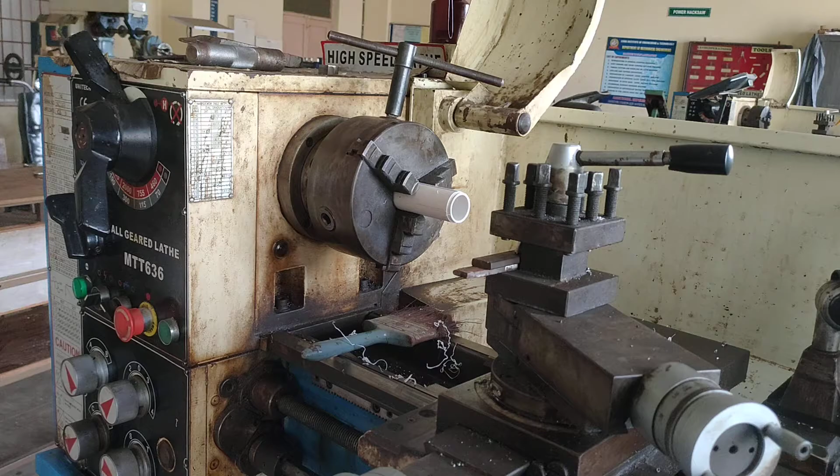Good morning, friends. Today I am going to discuss different types of chucks. What is the importance of chucks? Why do we use chucks? We will discuss this now.

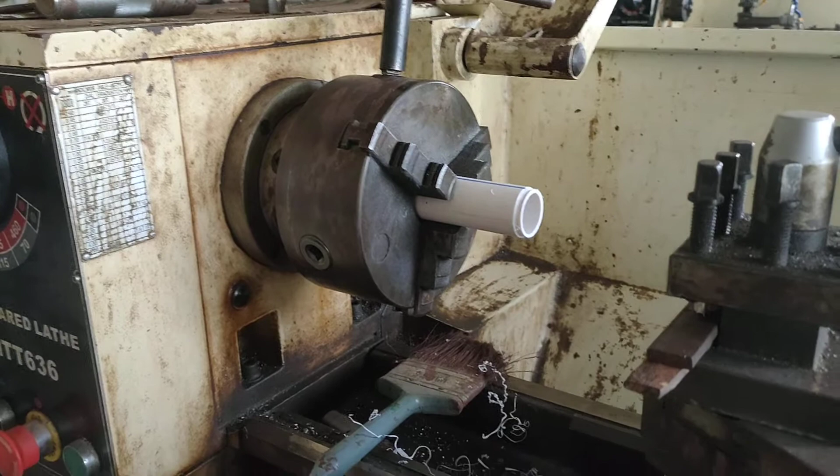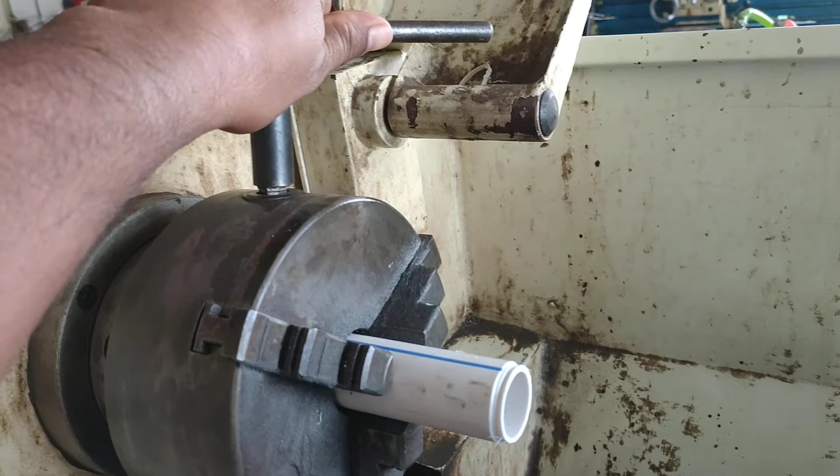A chuck is a device mainly used for holding workpieces. This is the workpiece, a PVC type workpiece. If you want to hold this type of metal workpiece, you can hold it, no problem. The main motto of a chuck is to hold the workpieces with the help of a chuck wrench. When the chuck wrench moves, it can move like this.

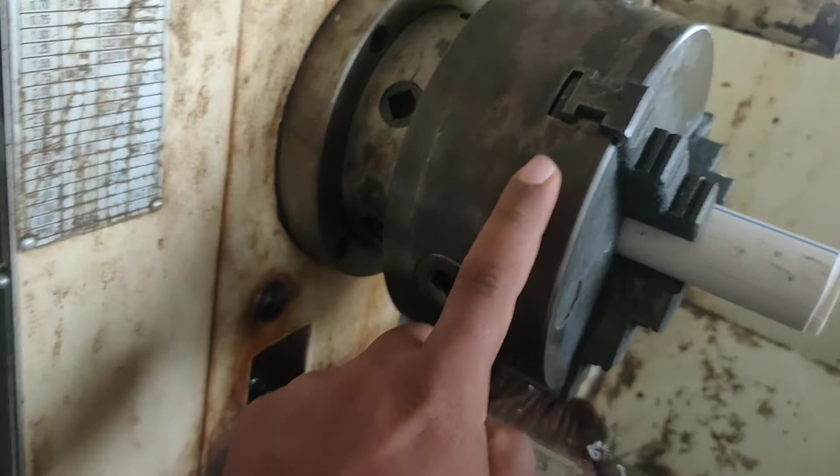In the same way, with the help of the chuck, we have to hold long length jobs as well as short length jobs. These chucks are fixed on the spindle, fixed to the spindle in this way.

Chucks have internal threads on the back portion. This is the front portion. In the back portion, these have some internal threads. These internal threads are fitted on the top surface of the spindle. The spindle has external threads, and the chuck has internal threads. These internal threads are fitted onto the spindle nose.

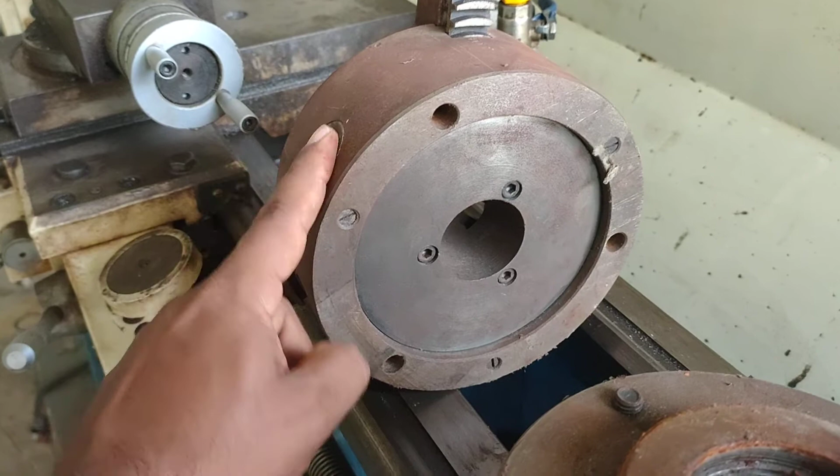Some chucks don't have internal threads. These have small holes for holding small hinges. Some hinges come and fit into this particular hole. In this way also we can fix the chuck on the spindle. Sometimes the chuck is attached to the lathe spindle by means of two or three bolts, with a back plate screwed onto the spindle nose.

These chucks are rotated manually as well as automatically. Chucks can be rotated with the help of power, or you can rotate them manually with the help of a chuck wrench. We will see how we can rotate this. We can rotate it with the help of electric power in this way. We can also rotate the chuck with the help of a chuck wrench manually, in this way.

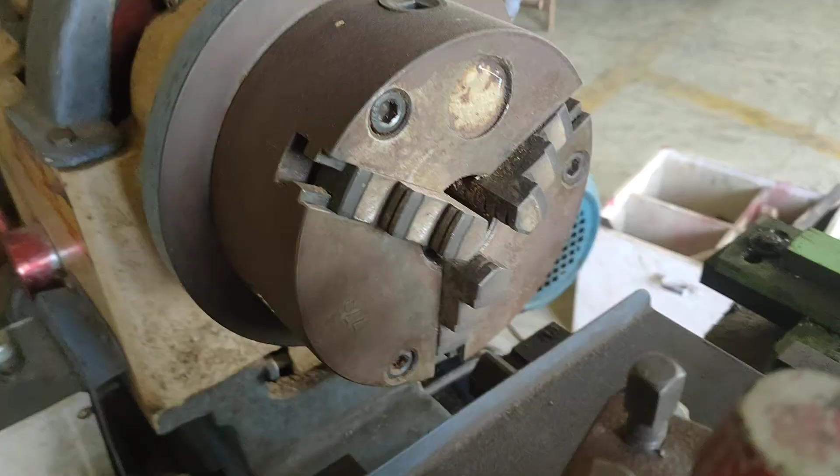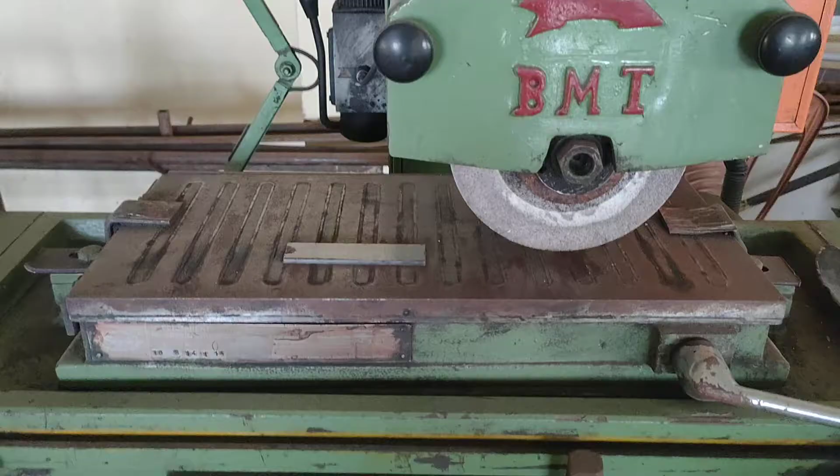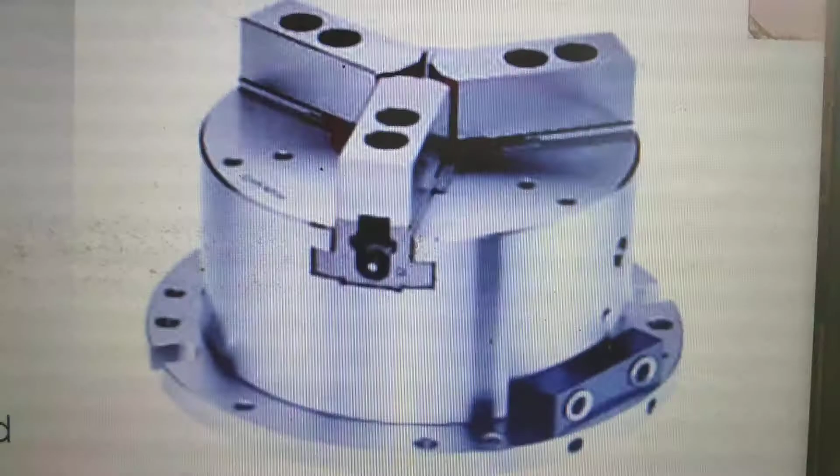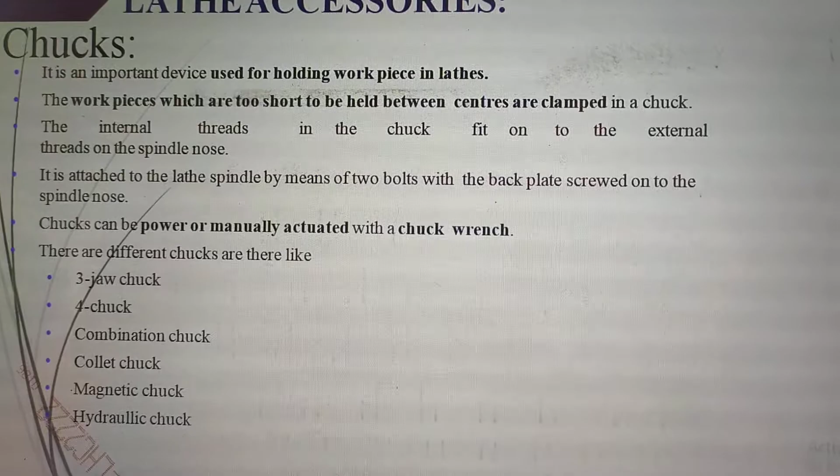Coming to the topic, we have different types of chucks: three-jaw chuck, four-jaw chuck, combination chuck, magnetic chuck, collet chuck, and drill chuck. And finally we have hydraulic chucks also. So we have different types of chucks like three-jaw chuck, four-jaw chuck, combination chuck, collet chuck, magnetic chuck, and hydraulic chuck. Chucks are mainly used for holding workpieces only, and these are operated by power as well as manually.

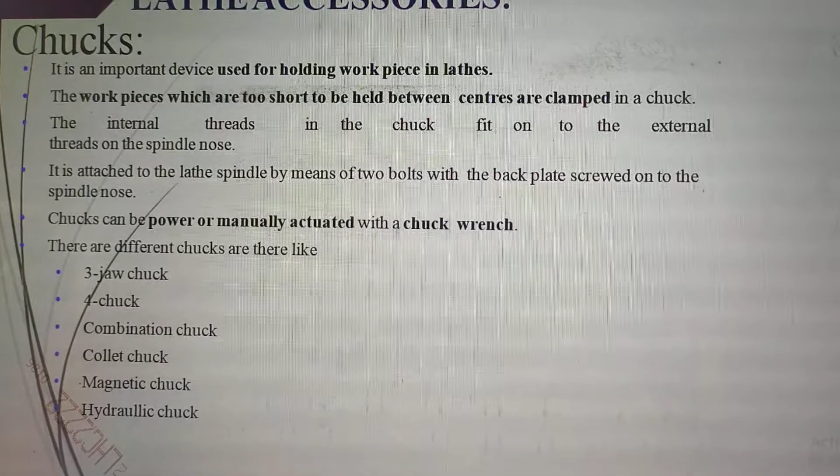Coming to the three-jaw chuck. This is the three-jaw chuck. It is also called a self-centering chuck and also called a scroll chuck. This chuck is only used for holding round jobs and hexagonal workpieces. These three jaws are moved simultaneously when adjusted by the chuck wrench. We will see how it is moving.

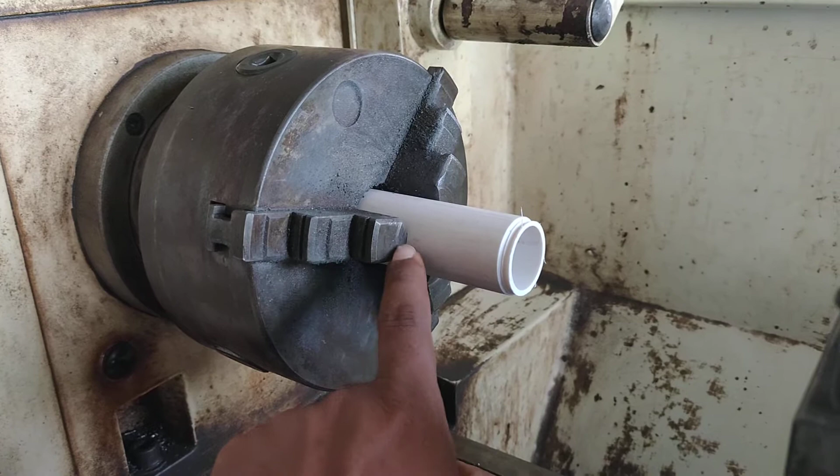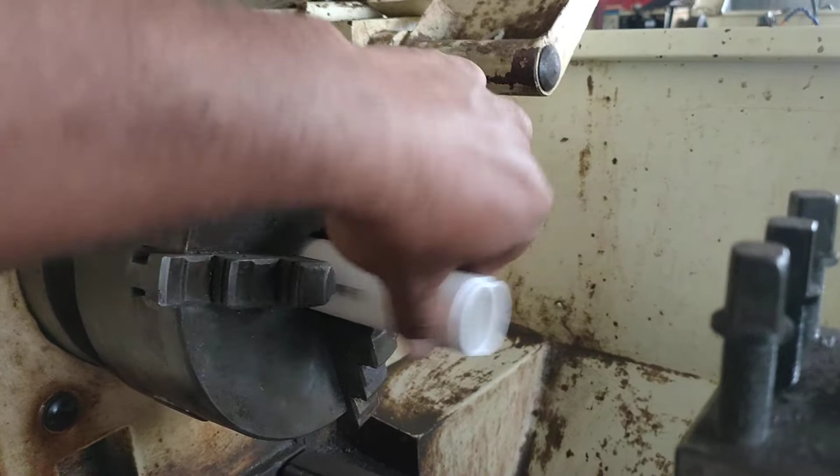This is the chuck wrench. These jaws are moved simultaneously when the chuck wrench moves. I am showing you here. When I am rotating the chuck wrench, all three jaws are moving at a time, so self-centering of the workpiece is happening here.

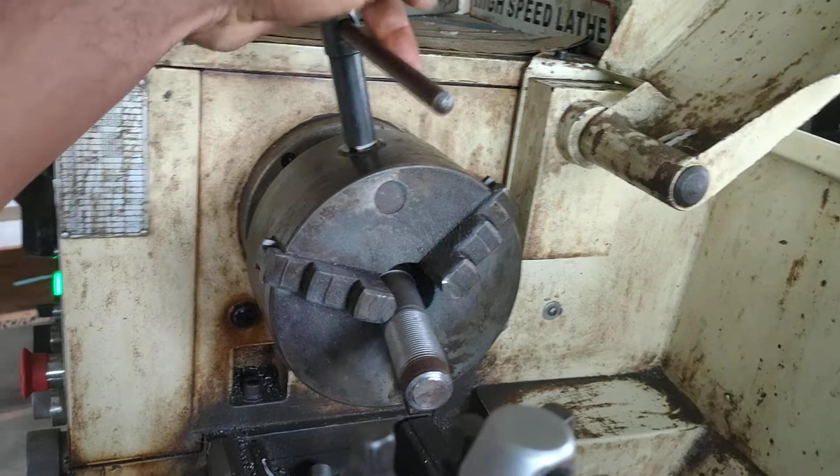Now I'm placing one more workpiece. In this way we can hold the workpiece in the 3-jaw chuck.

These are usually provided with two sets of jaws. This is one set of jaws, and we have one more set of jaws also. This type of jaw set is used for holding internal chucking, while one more type of jaw is used for outside chucking. So we have two sets of jaws, one for outside chucking and the other for inside chucking.

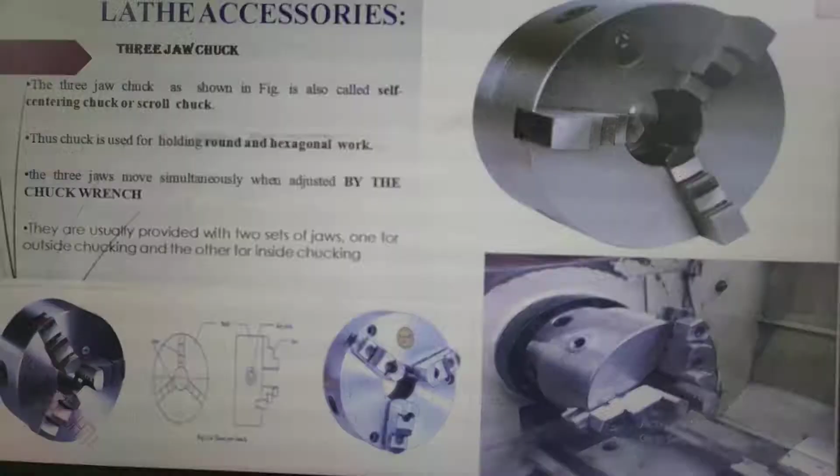So, 3-jaw chucks are also called self-centering chucks. These are used for holding round jobs as well as hexagonal jobs, and they are easily adjusted by the chuck wrench.

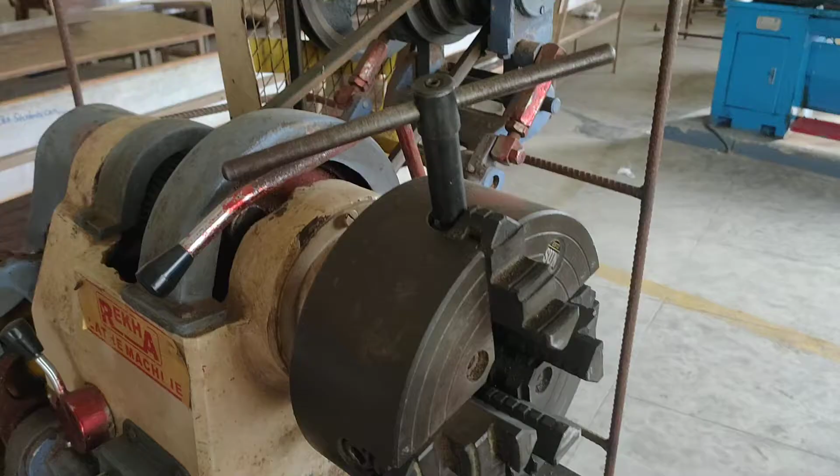Coming to the 4-jaw chuck. This chuck has 4 jaws, each of which can be adjusted independently by a chuck wrench. It has 4 jaws: 1, 2, 3 and 4. These jaws are adjusted independently with the help of the chuck wrench. When I am rotating this particular chuck wrench, only this jaw can move. We will see.

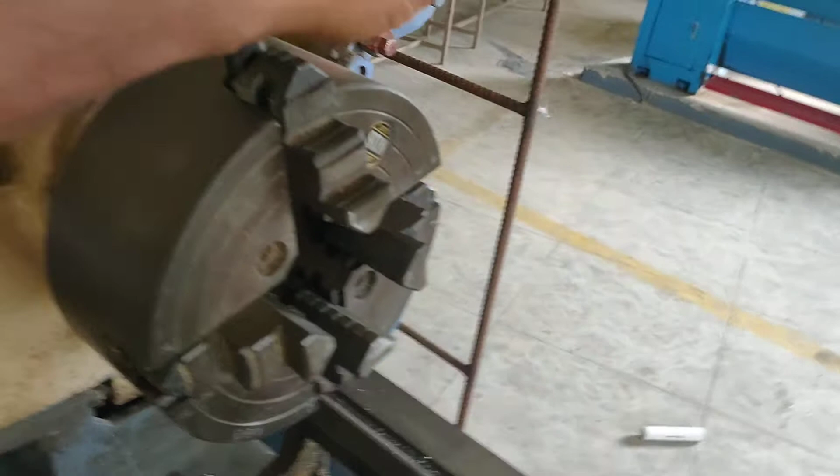You can observe only that jaw can move; all the other jaws remain stationary. In this way we can fix the workpiece in this particular 4-jaw chuck.

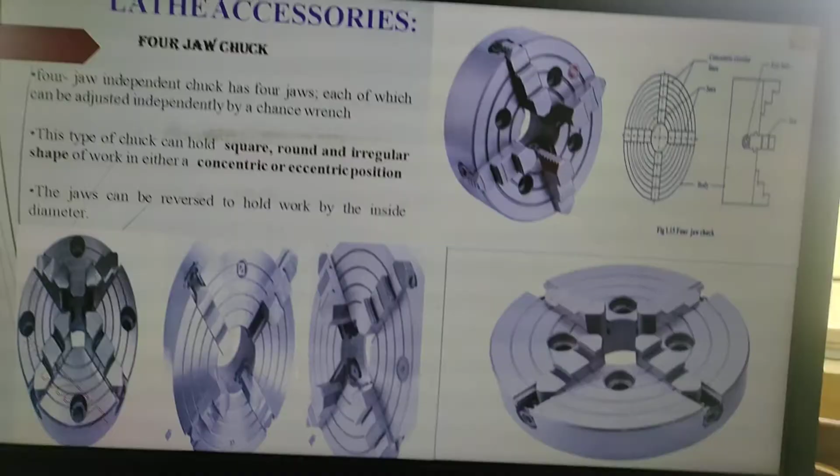Coming to the 4-jaw chuck: this type of chuck can hold square, round, and irregular shaped work, either in concentric or eccentric position. The jaws can be reversed to hold work by the inside diameter. So these are the different types of 4-jaw chucks.

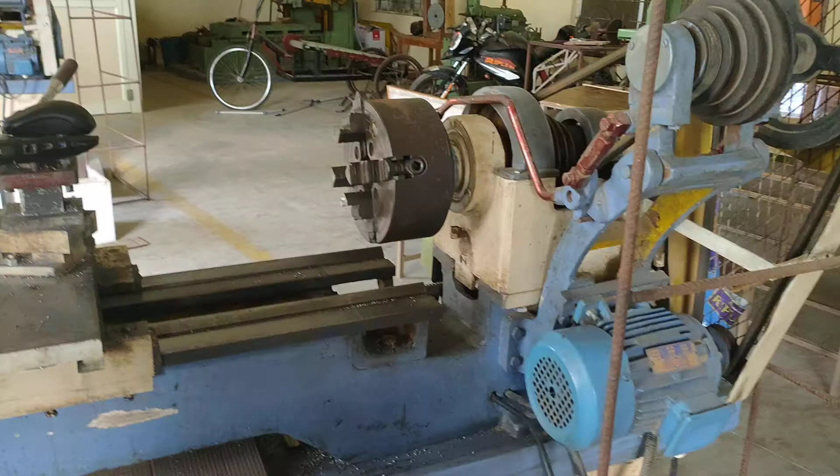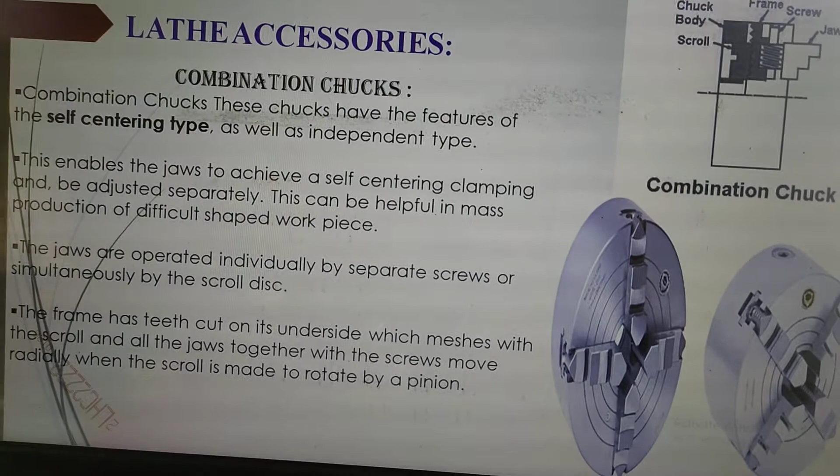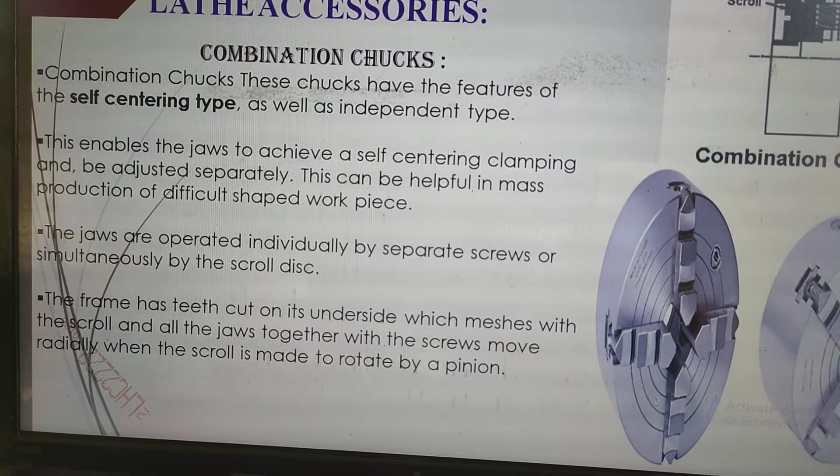So this is a combination chuck which is fixed on a lathe machine. We will see how it is working. So coming to combination chuck. Combination chuck has features of both the 3-jaw chuck and the 4-jaw chuck. So it has features of the self-centering type as well as the independent type. That's why this is called a combination chuck.

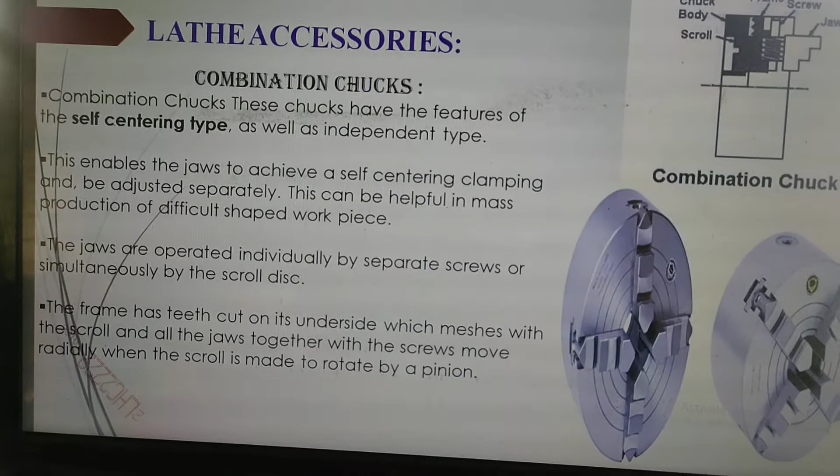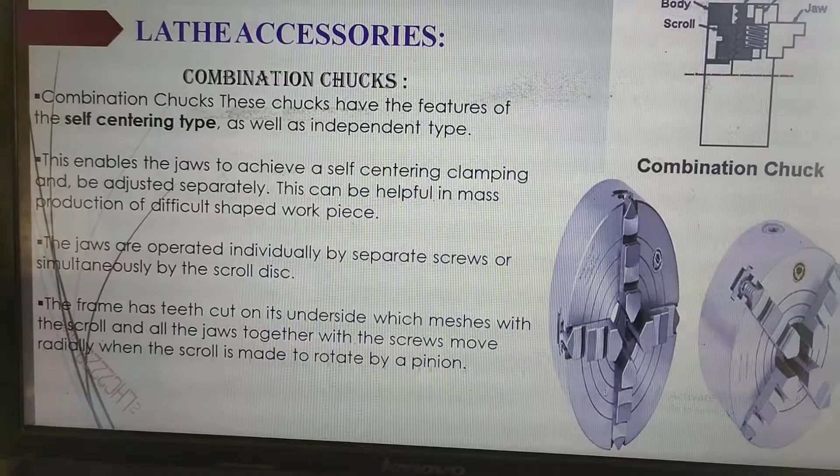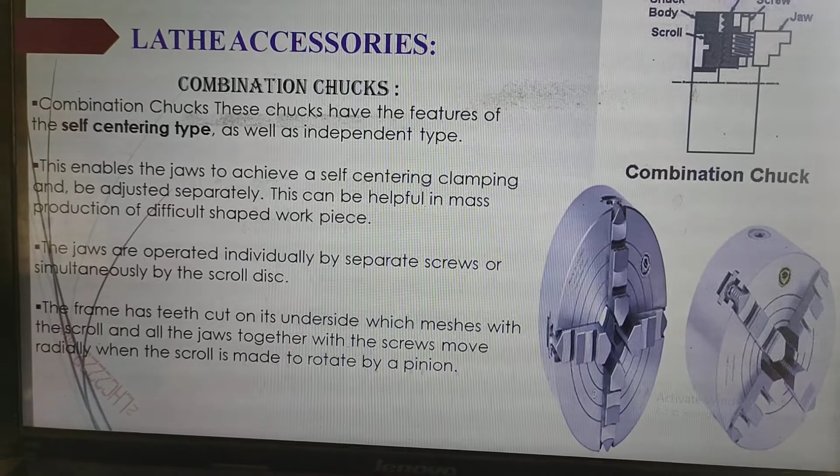Actually, these jaws are operated individually by separate screws or simultaneously by the scroll disc. Separate screws are the 4-jaw chuck feature, and the scroll disc is found in the 3-jaw chuck only. So that's why this has two features, 3-jaw chuck features as well as 4-jaw chuck features. That's why this is called a combination chuck.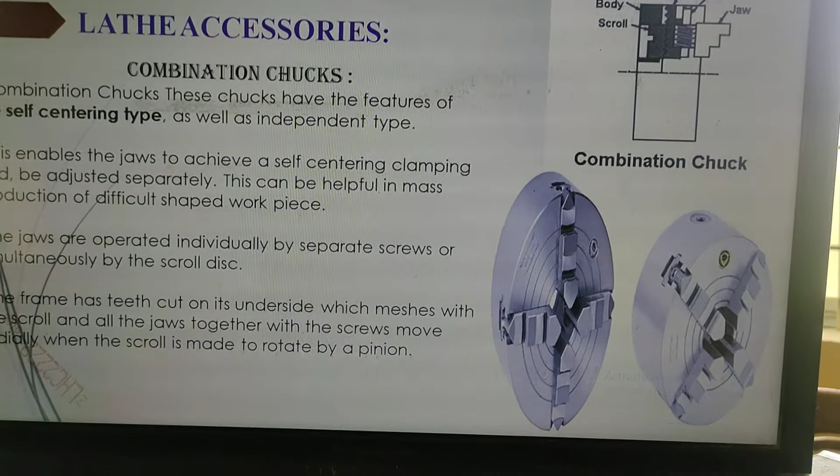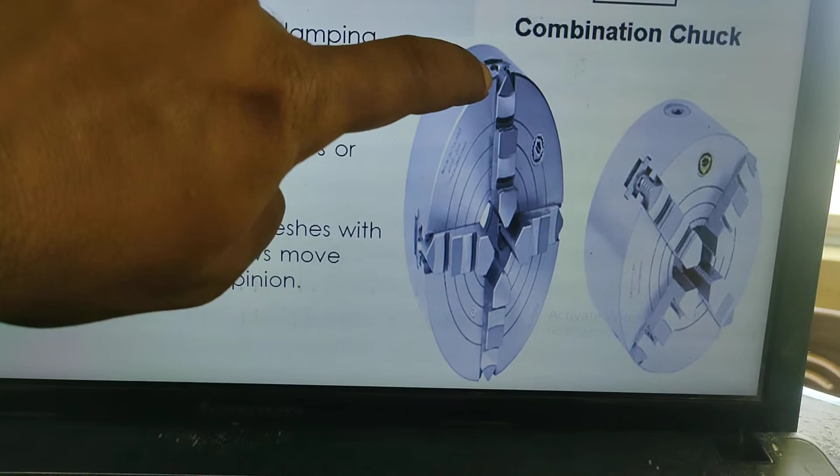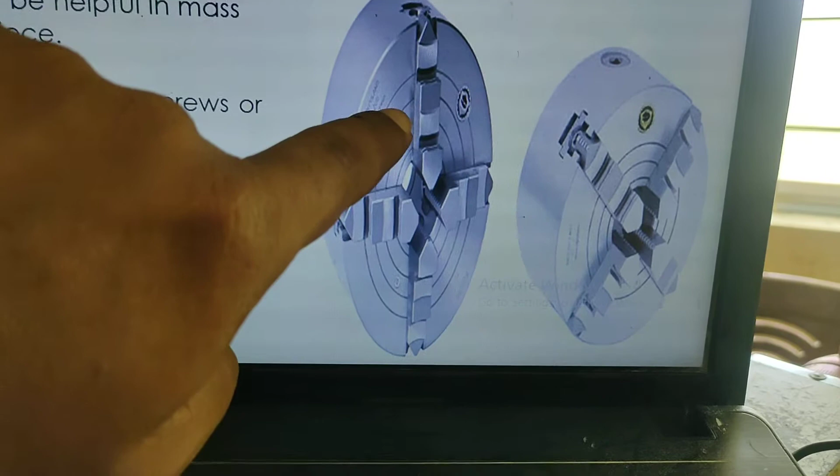So the combination chuck has 4 jaws, like these 4 jaws. With the help of a chuck wrench, we can move this particular screw, and this particular jaw will move. If you want to move all four jaws, you can use this hole with the help of the chuck wrench. All 4 jaws will move, because these 4 jaws are attached to the scroll disc. The scroll disc is an internal mechanism.

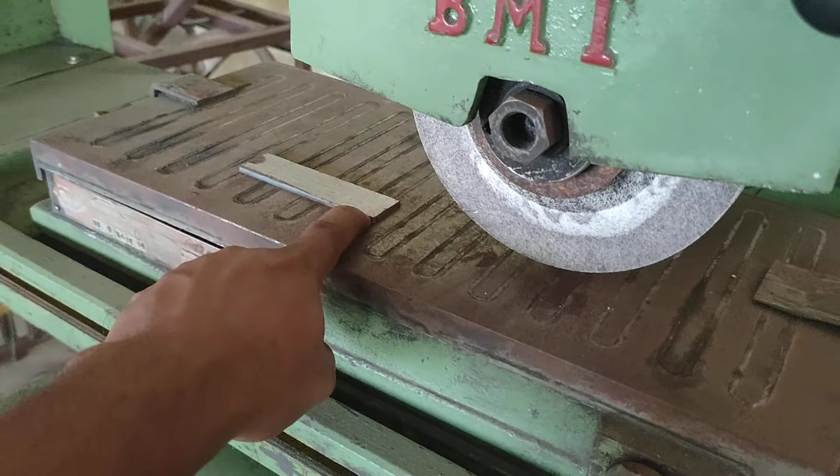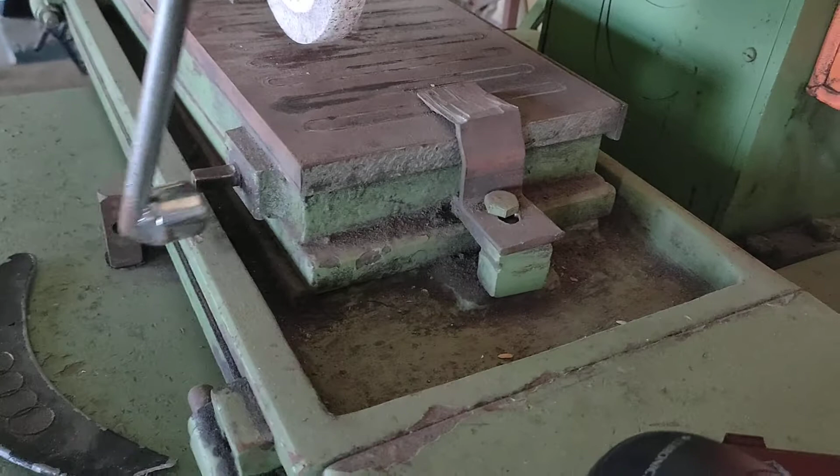Actually, magnets are adjusted inside the chuck to hold or release the workpiece. The magnets are placed inside the chuck. So this is the magnetic lever. When we engage this magnetic lever, I'll show you, the workpiece is held, firmly fixed on the magnetic chuck.

When we disengage it, we will see what happens. Now I'm disengaging the magnetic lever, to this position. So the workpiece easily comes off the magnetic plate. Now the workpiece is fixed; it does not come off the magnetic plate. Now I'm disengaging the magnetic lever, and the workpiece comes out easily. So in this way we can hold the workpiece on the magnetic chuck.

Actually, there are different types of magnetic chucks; circular magnetic chucks are also there. There are permanent magnetic chucks and electromagnetic chucks. This is a permanent magnetic chuck. If the magnetic chuck is operated with the help of electricity, it is called an electromagnetic chuck.

So how does it work? This is the on position. In the on position, the magnetic flux passes through the workpiece and grips the workpiece. So it does not come off. I'm trying to remove this, and it does not come off. Why? The magnetic flux has already passed through the workpiece.

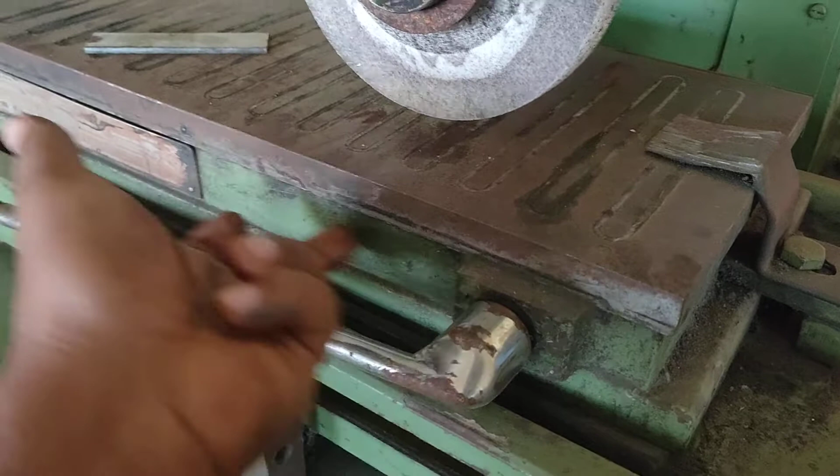Now we will see the off position. In the off position, the magnets are set aside, bringing them in contact with the high-permeability keepers. Some keepers are inside the magnetic chuck, and the magnets are placed on top of the keepers. So magnetic flux does not pass in the off position. That's why the workpiece comes out easily.

So in the on position, the magnetic flux passes into the workpiece, and the workpiece is firmly fixed on the top surface. In the off position, no magnetic flux passes, so the workpiece comes easily off the plate. In this way we can hold thin workpieces only on this magnetic plate.

So these are some of the magnetic plates. This shows the internal parts of the magnetic chuck. This is a rectangular type magnetic plate. This is the circular type magnetic chuck. Actually, I already told you about that.

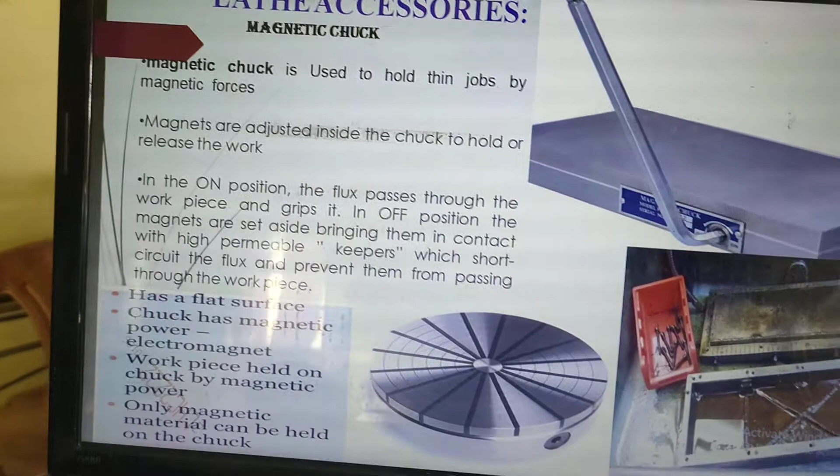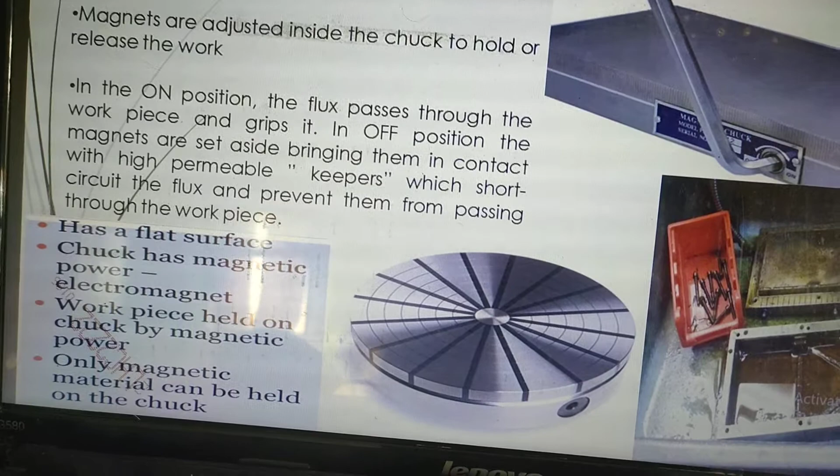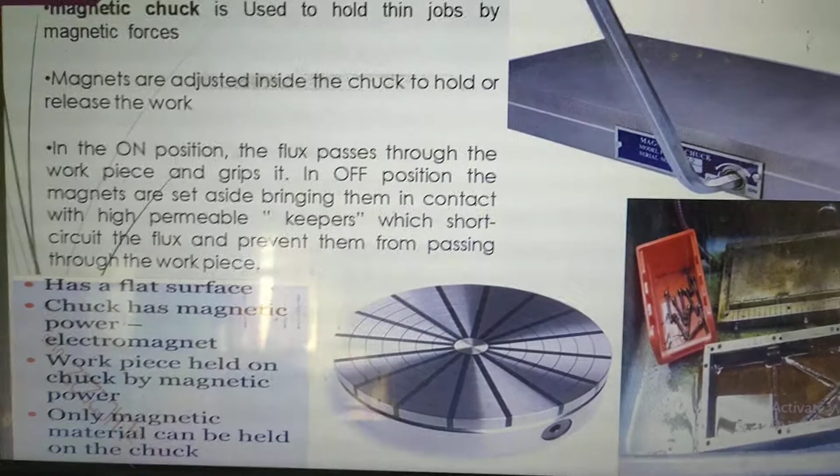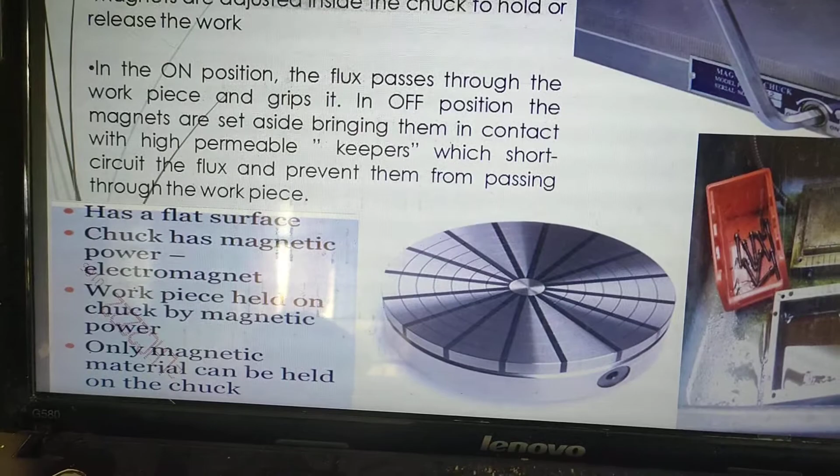So it is used for flat surfaces. The chuck has some magnetic power, so only magnetic materials can be held on the chuck. Only magnetic materials we can fix, like cast iron and mild steel. If you want to fix an aluminum piece, it cannot be held on the magnetic chuck. So only magnetic materials can be held on the magnetic plate. That is one of the drawbacks of magnetic chucks.

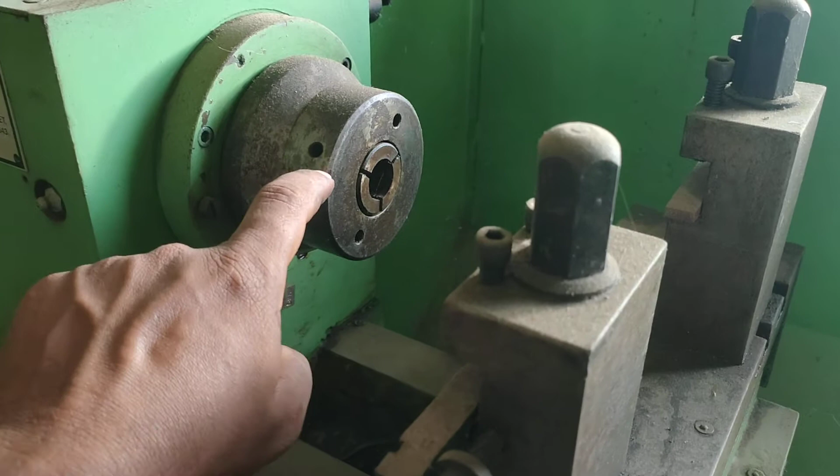Next we will discuss the collet chuck. Collet chucks are mainly used for holding very small diameter workpieces. At maximum we can fix only 20 mm diameter in this particular machine. Collet chucks are used in different types of machines, like capstan and turret lathe machines. Most of the time collet chucks are also used in CNC machines.

This is a capstan lathe. It doesn't have a tailstock; it has a turret head on the top of the ram, that's why it is a capstan lathe. We are fixing a collet chuck on the capstan lathe. Collet chucks are used for holding small diameter workpieces only. It has a cylindrical bushing. This cylindrical bushing is called a collet.

These collets are made of spring steel materials. It has some slots cut lengthwise on its circumference, so it holds the workpiece with more grip. These are the slots: one, two, three. These slots have a springy action. Due to that springy action, this collet chuck can hold the workpiece.

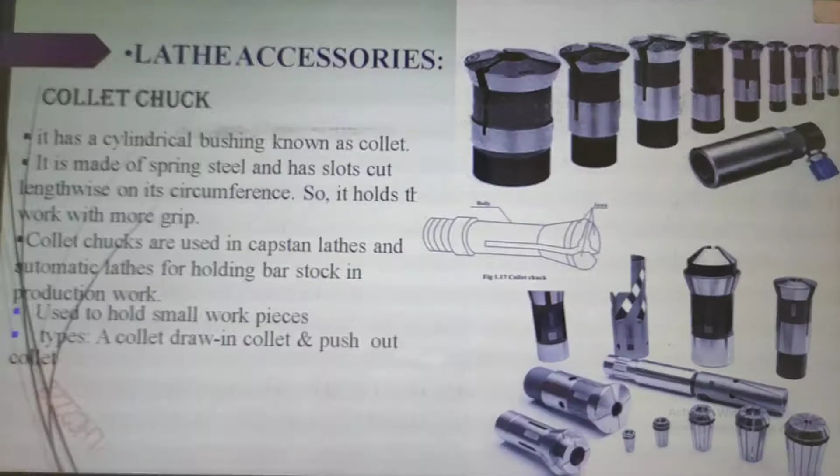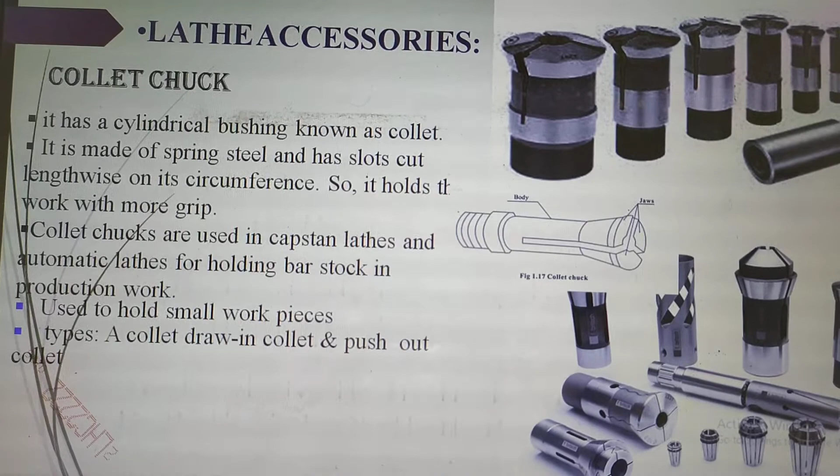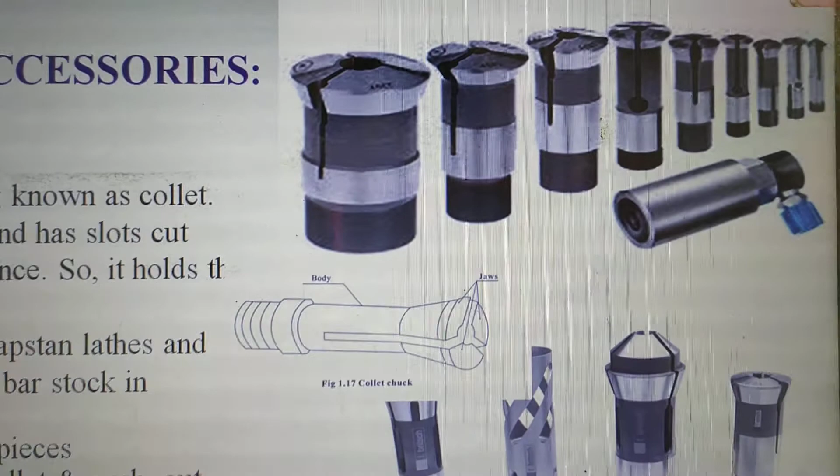These are the different types of collet chucks. Collet chucks are used in capstan lathes and automatic lathes for holding bar stock in production work. It can be used for small workpieces only, as I already told you. There are different types, like draw-in collets and push-out collets. These have different types of slots with springy action, so due to that springy action it can easily hold the workpiece.

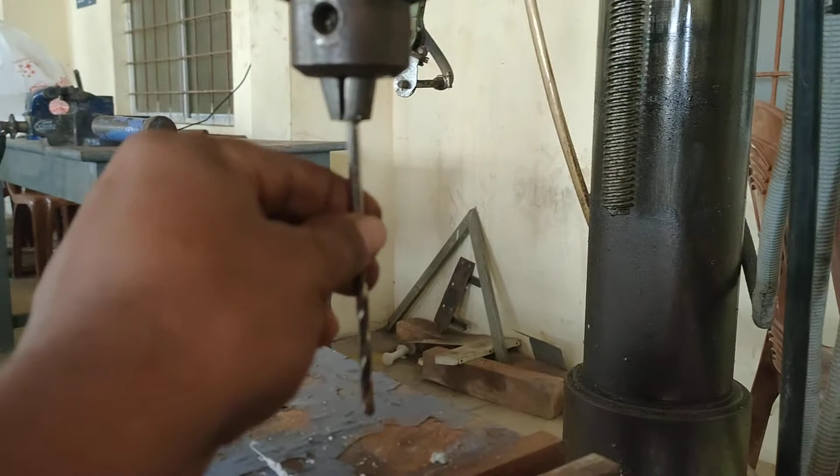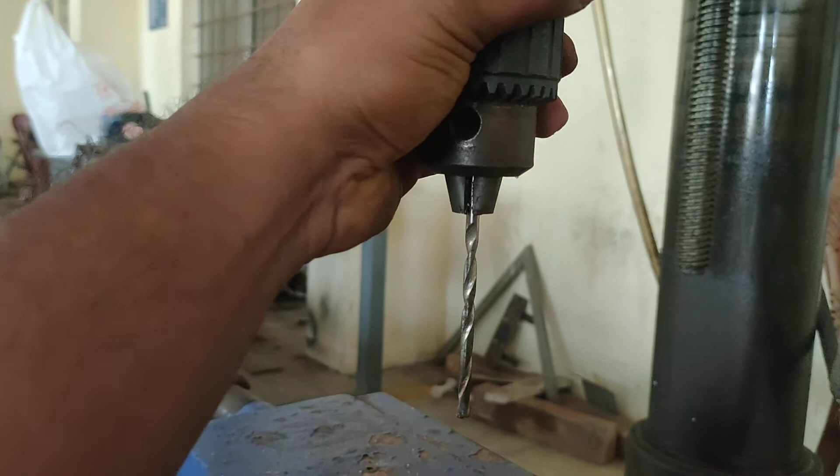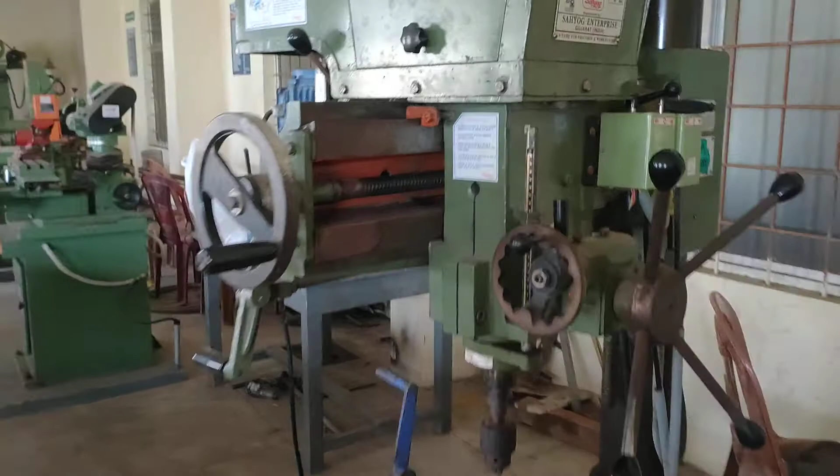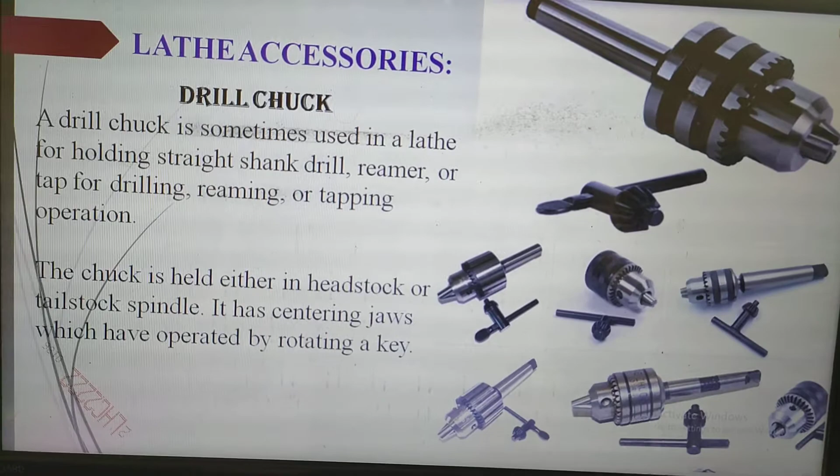Then we will discuss the drill chuck. This is a drill chuck, and this is the drill bit. I will hold the drill bit in this one. In this way, you can fix a twist drill in a drill chuck. This drill chuck can be fixed on this spindle. Drill chucks are used in drilling machines as well as lathe machines; you can use them anywhere, no problem.

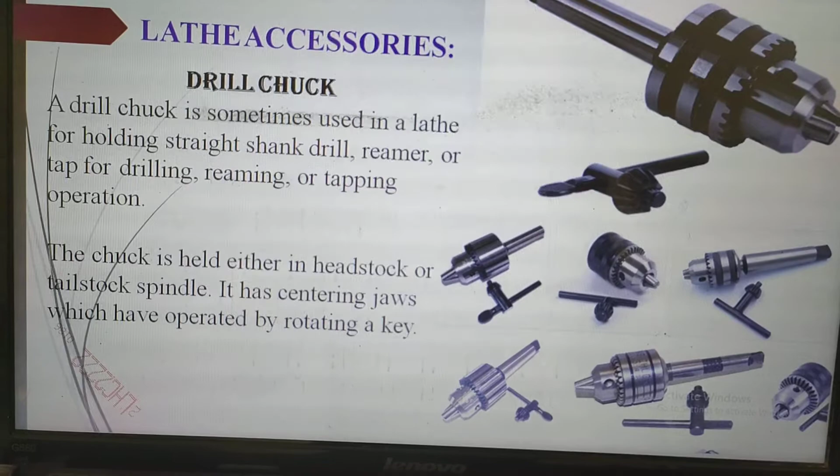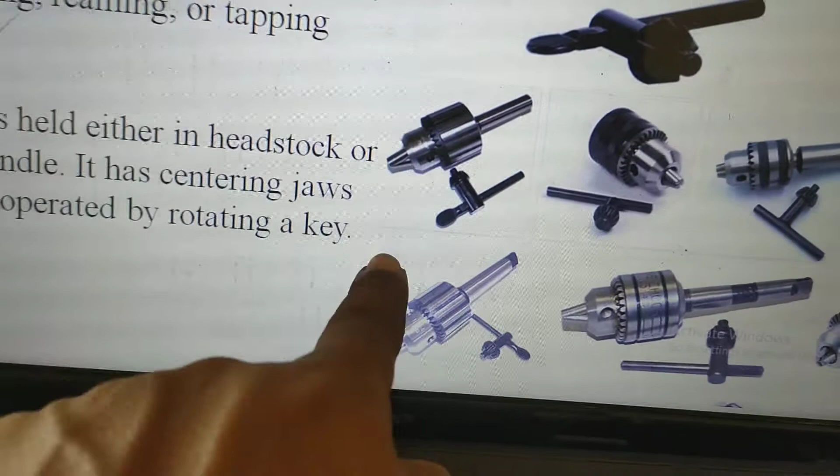The chuck is held either in a headstock or a tailstock spindle. It has centering jaws which are operated by rotating a chuck key. This drill chuck is operated with the help of the chuck key; this is a rotating key, sometimes called a chuck key. These are all the different types of drill chucks.

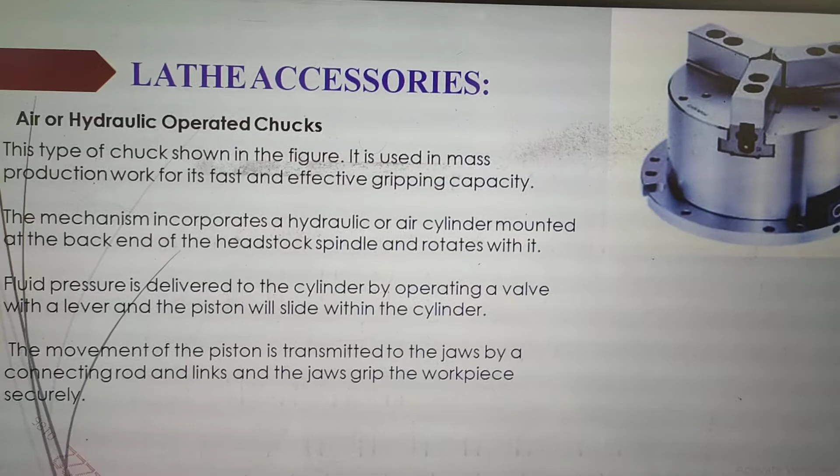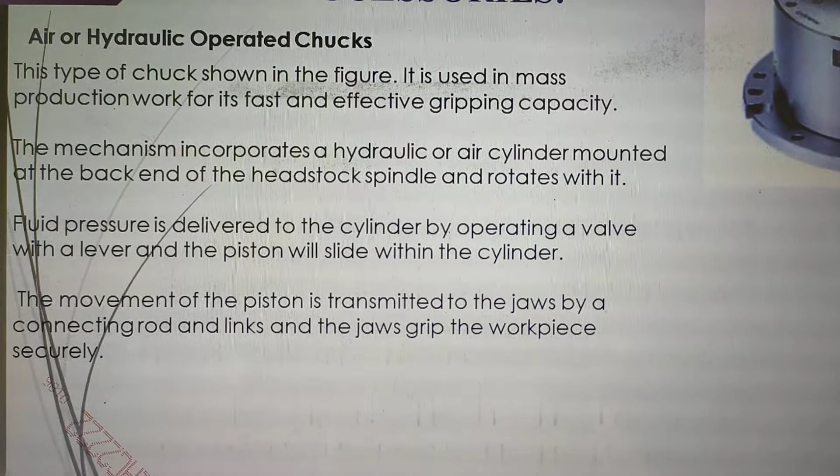Finally, we have one more type of chuck: the air and hydraulic operated chuck. These chucks are operated by hydraulic fluid or sometimes compressed air. They are mainly used for mass production, because they have fast and effective gripping capacity.

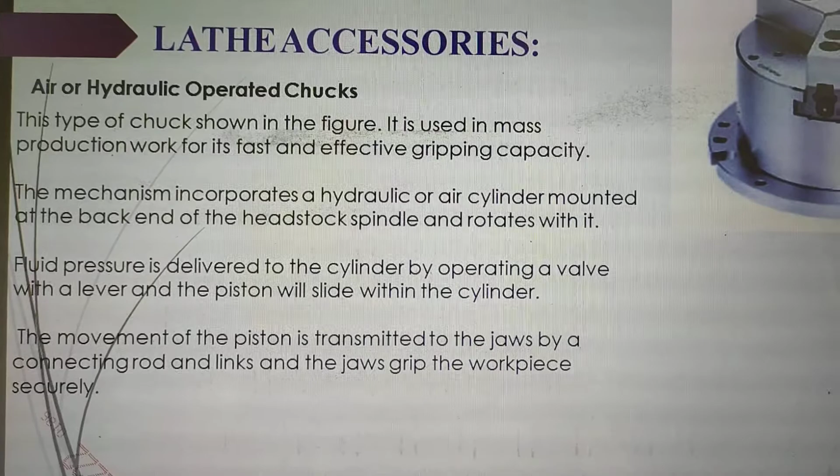The mechanism incorporates a hydraulic or air cylinder mounted at the back end of the headstock spindle and rotates with it. The fluid pressure is delivered to the cylinder by operating a valve with a lever, and the piston slides within the cylinder. This is the mechanism incorporated in the air and hydraulic operated chuck.